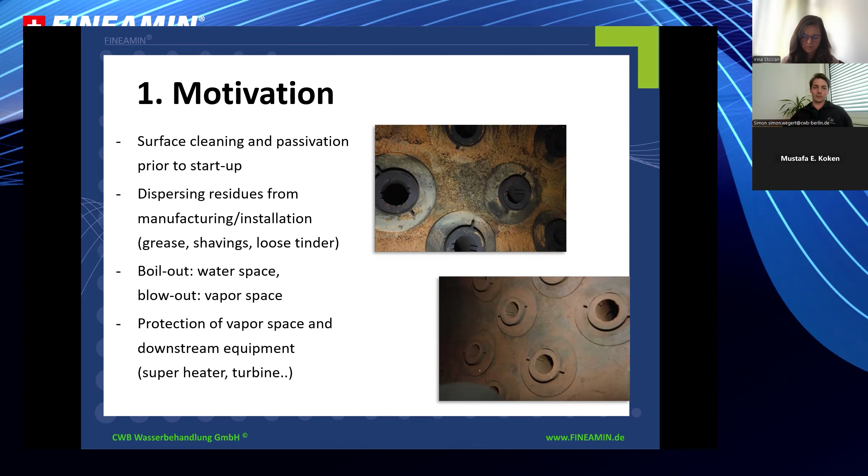Since steam boilers and power plants are a relatively old invention, of course, there are several established methods how to clean your steam boiling equipment. You can either use acidic solutions, tri-sodium phosphate, alkaline solutions, but all of these conventional methods come with, I would say, high disadvantages that you want to avoid. Like, for instance, the security costs in handling highly acidic solutions, the ones you would use for cleaning your boiler with acid.

And also, as most of you may know, if you let steel come in contact with acids, the material will be damaged after all. It might get clean, but it also comes with the cost of losing some of your wall thickness, the structure of the metal, the surface. It will get more porous, as shown in the picture above. And if you can avoid that, you should. And therefore, I would not recommend cleaning any steel equipment using acids. With the also well-established method of using sodium phosphate, you also have the problem of the disposal of your sewage water.

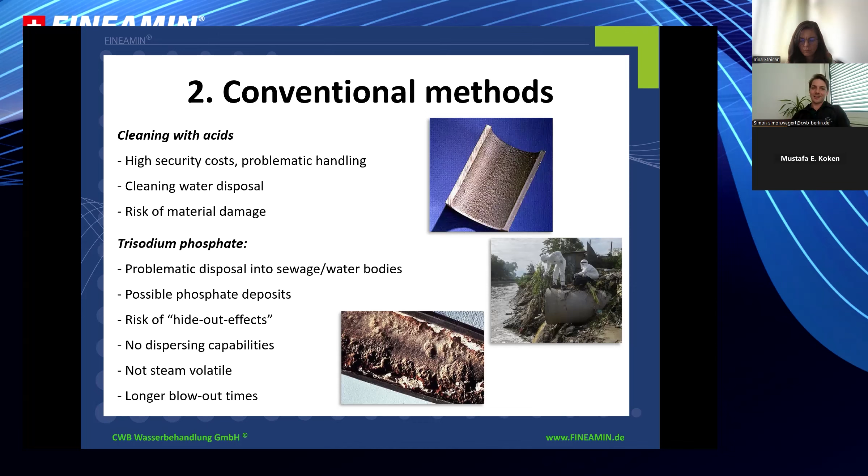which should also be avoided. But the main disadvantage of using a salt like phosphate or caustic soda, for instance, is that you will never reach your vapor space with this solid cleaning agent, which then results in a higher number of blowout cycles you would need to get steam purity. So this disadvantage is also present in using caustic soda.

Caustic soda seems to combine the disadvantages of using acid. You have highly alkaline wastewater, quite a lot of that. Also, the risk of stress corrosion cracking later in boiler operation, simply because of the structure of the sodium hydroxide molecule, which also might hide out at the boiler walls and lead to problems later.

And since it is a salt, again, you don't reach the vapor space. You have rather long blowout times, which result in higher downtime, and basically you lose money because you cannot run your boiler.

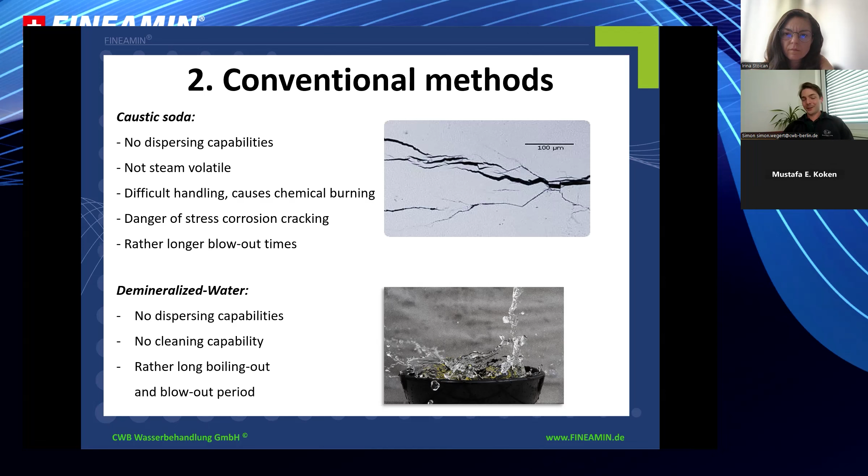About demineralized water as a cleaning agent, I should not lose too many words. It should be clear that if you're not using any cleaning agent, neither alkaline nor acidic, the cleaning properties are just very, very bad, and you would need much more time to boil out your boiler to reach steam purity. So you lose money, you lose time, and how to avoid that?

Just use Fineamin. You can basically flip all the disadvantages I listed above, flip them from head to toe, and you'll have the advantages of using Fineamin. It's efficient, provides a very fast process, safe to handle, quite simple to use, and overall cost effective.

The pictures I'm sharing here with you are obviously not from a newly built boiler, but the advantage of Fineamin technology is you can use it either on new equipment, but also if you already have quite old residues on your boiler walls, you might just run it several times using Fineamin products, and the surfaces will get smoother, the residues will get dispersed, and you can just flush them, and the boiler walls will be cleaner than before.

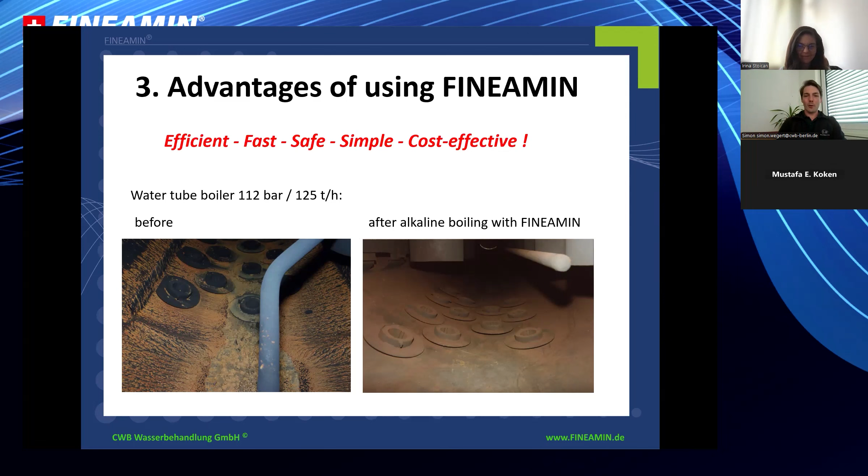This is a more representative picture. What you want to achieve on your walls is not only a clear, smooth surface, but of course also a passivated surface of magnetite. So you want to basically protect your metal walls by building up this magnetite layer. And formation of this layer is favored if you're adding Fineamin because the molecules provided in our solution are like a connecting link between the boiler wall and the magnetite that's forming on this wall.

And if you use Fineamin for boil-out, you can already have this magnetite layer slowly build up during the boil-out procedure, which comes as an advantage for later operation.

Again, the advantages summed up in one slide. The wastewater disposal is much easier compared to conventional methods because the water quality you will get boiling out with our product is basically the same water quality you'll have in regular operation. So the plant you're boiling out already has a plan of how to get rid of their wastewater in regular operation. And for the boil-out process, it's just the same. It's not higher in alkalinity, not acidic, basically less problematic than in the conventional methods mentioned before.

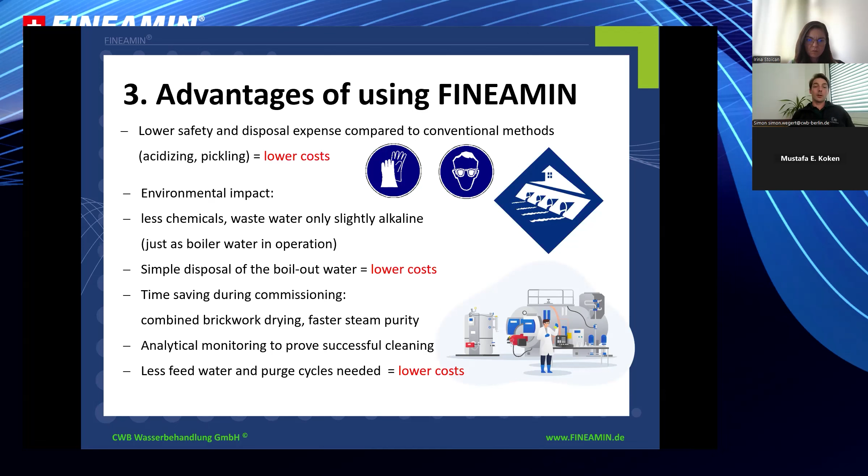And since the chemicals we're using are effective in cleaning, more effective than the established methods, the client would use much less feed water, fewer purge cycles, and therefore can also start the power plant faster, which again results in fewer losses of costs.

Then I wanted to say a few words on how simple it is to do. Basically, all you need is a sufficient amount of feed water, of course the Fineamin solution, which we provide, and the dosing equipment, meaning a high pressure pump, that should be as high in the pressure range as the feed water supply of your client.

And of course, for boiling out, you'll need a boil out temperature, which should be above 150 degrees Celsius. And this temperature should be held for at least 24 hours. You can run 2 cycles of boiling out for 24 hours with an exchange of water in between, a purge cycle in between, or even more time efficient would be one single run of 48 hours boiling out.

Then for monitoring the success of the boil out procedure, it's just basic lab equipment you will need, like a pH measuring device. Conductivity should be monitored, and the level of Fineamin that's present in the boiler. And also quite interesting is the amount of dissolved iron in the boiler. As I'll show you later, you can see in the iron content how successful the boil out or the cleaning of your boiler is running.

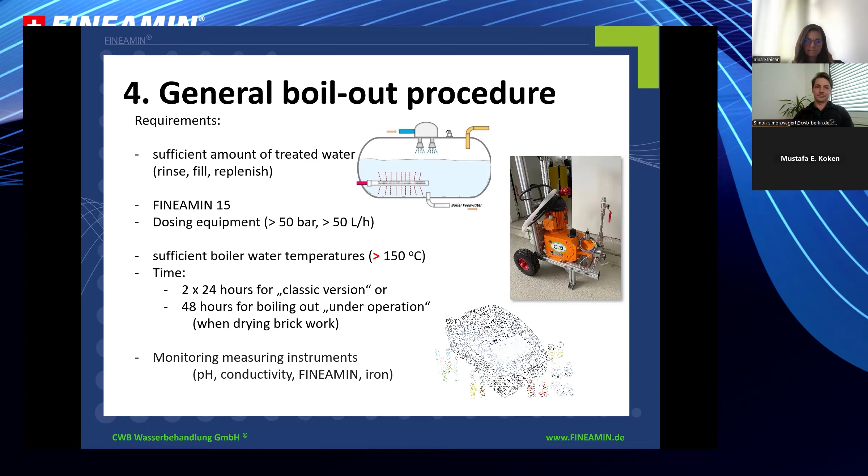And the step-by-step introduction in how to boil out your boiler: you basically purge it with demin water before starting operation, which is like a first step of cleaning the loose debris. You purge it, you dispose of the demin water of the purge cycle and fill it up, already adding Fineamin to a target concentration of 15 parts per million.

And you heat up to reach the boiler temperature of 150 degrees or more. The higher the better, because higher temperatures favor the formation of this magnetite layer I was mentioning before.

During the 24 or 48 hours of boil out procedure, there will be something happening in the boiler, like the loose iron from the boiler walls. It will basically get dispersed from the walls and flow through the system, and this debris or flowing iron content you will have to blow down to get it out of your system.

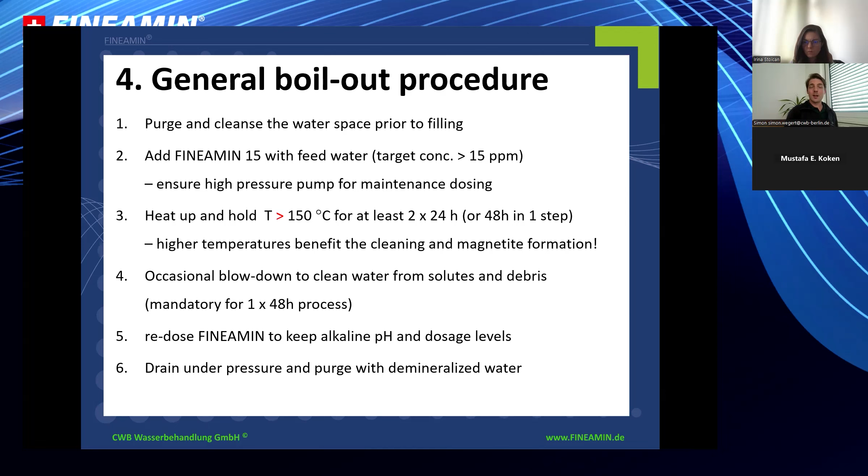Once you have your 48 hours and the results you wanted to obtain are reached, you can shut down the power supply, wait for the boiler to cool down, and once it's at 5 to 2 bars, just drain it under this pressure and purge again with demineralized water. And then you're basically done. You have a clean boiler, and what I want to show you here is how to optimize the process.

Since it's that easy, of course, there are several ways to make it even more efficient. You can save some time if you combine the boil out, the heating up, and keeping the level of a high water temperature above 150 degrees. You can combine this already with brickwork drying, so you won't have to heat up your boiler twice. As mentioned before, the higher the temperature is, the faster the magnetite layer will form, and also the more effective the cleaning will get.

There are two basic schedules of handling your boil out operation, either 24 hours twice or one time 48 hours. If you don't want to waste so much water and time, you just keep the boiler running for 48 hours and exchange the water step by step every few hours, doing a periodic blowdown.

This is just as efficient as draining it after 24 hours, then filling it up again, heating it up again. The cleaning success will be the same. It's only that you lose less water, less time, and less energy.

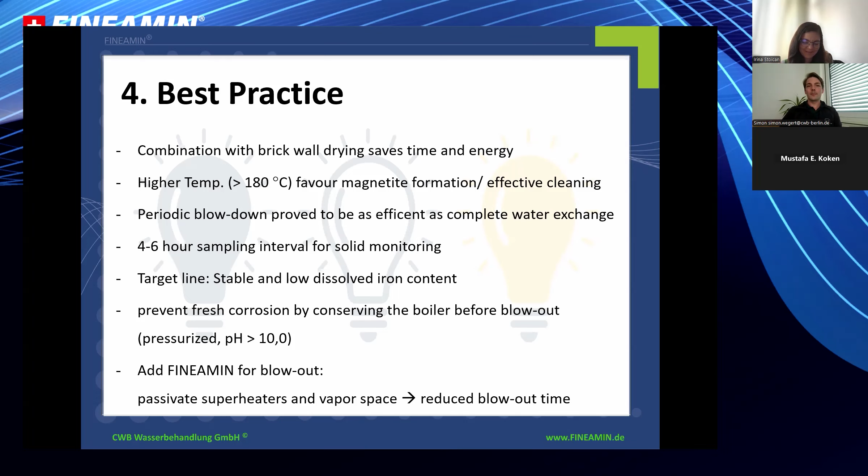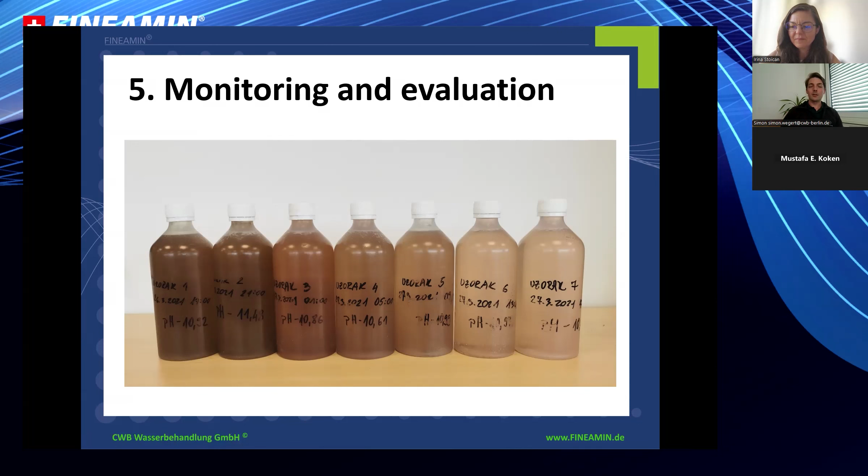So basically, we are using it for boiling out, we are using it for continuous treatment, and we are using it for preservation. Unlike the traditional methods, Fineamin, film-forming amine-based technologies are giving us this privilege. And this is something definitely superior considering the traditional approach. And here, Simon mentioned the product name Fineamin 15. I'm sure he will agree.

Definitely, we also have some dedicated products for the boiling out process and procedure. But in theory, the product that we are using in any site that is based on film-forming amines can be modified in terms of the dosage and can be used for the boiling out process as well. Of course, Fineamin 15 has its own specifications, a bit more dispersion power, the polymer content, and so on. But in reality, we are talking about different possibilities.

So it is quite interesting, the sequence of applications: boiling out with the same product, continuous treatment with the same product, preservation with the same product. So those are the interesting advantages of the film-forming amine-based treatment.

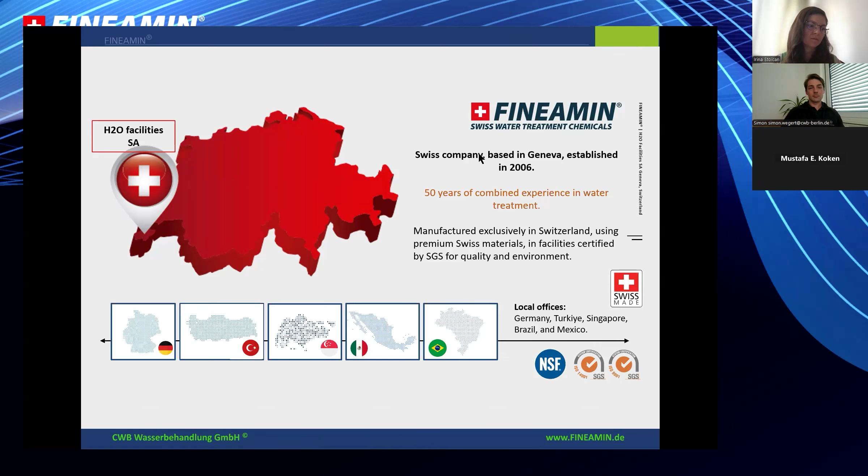I would also like to clarify something, Simon. You mentioned in the later slides the Fineamin residual, the product residual, like 15 ppm. So when you convert this into free film-forming amine excess residual, what would be the content? Or did you mention this as FFA residual? I just would like to clarify with the people.

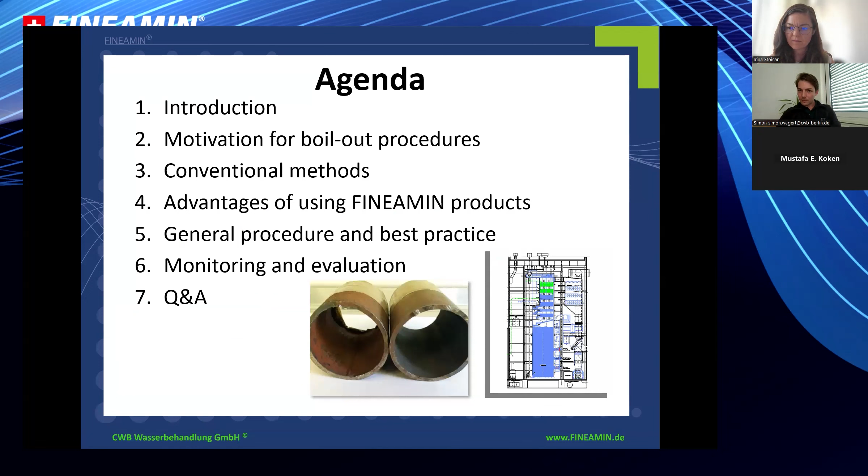If you go down to the later slides, probably the slide before the last one, you showed a graph with a declining pattern of the iron level. Go ahead, please. No, before that one, please. Yeah, before that. You said 15 ppm. So 15 ppm as Fineamin product or 15 ppm as free film-forming amine excess? Which one? Fineamin product. Okay.

This does not refer to the filming amine content, but what is easiest to measure is the polymer content. Okay. So you are not necessarily measuring the free film-forming amine excess here, but you are measuring the polymer content instead.

Okay. Since there is a question in the chat, what type of analysis method we are using to check the residual of Fineamin. There are several ways we can use. Both of them are photometric tests, and it either goes on turbidity of the polymer, or we use the Rose Bengal test for the amine testing.

Yes. So in fact, for film-forming amine, just to clarify this question from Gregorio, we have a titrimetric method using a Hach test kit, and then we have much more precise, high accuracy tests using spectrophotometry. The method is called Rose Bengal, and we are also a manufacturer of our own kits, and now the famous company Dr. Lange is also making specific kits for polyamine residual.

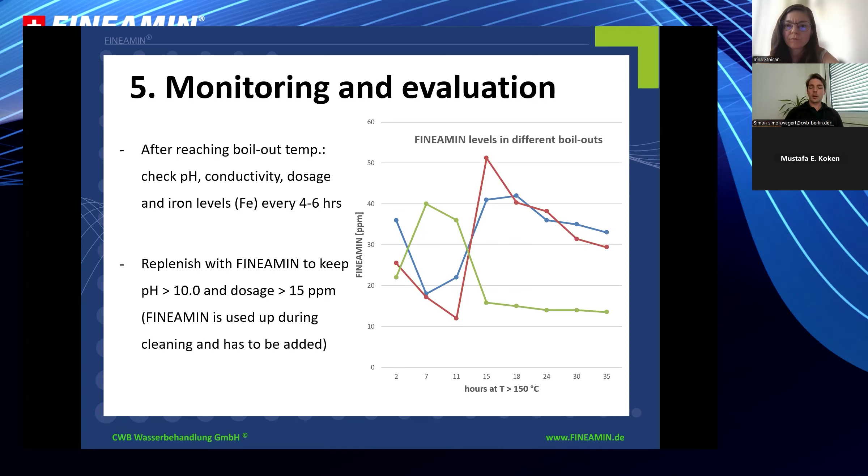Right. And another question from Gregorio is about the iron concentration I was referring to here. This is soluble iron, also measured photometrically using a, I forgot the name of the test, but it's photometric testing. Yeah, spectrophotometric. Okay.

Okay. And what else do we have?